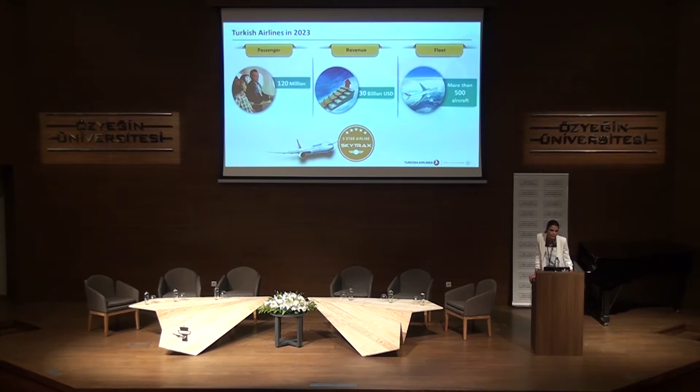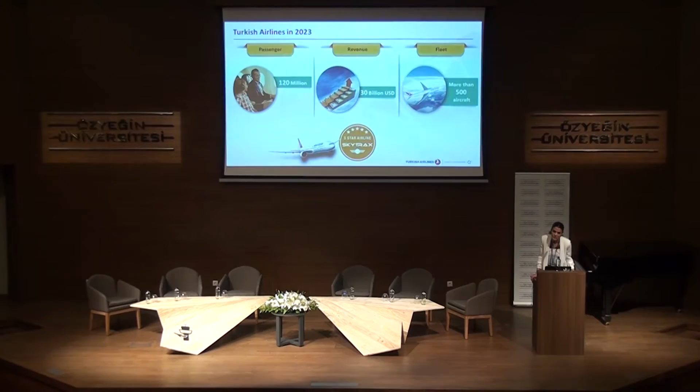We said that today's aim is to discuss how airlines are shaping their strategies with the introduction of Istanbul New Airport. And this discussion wouldn't be possible without a representative from Istanbul Grand Airport. Therefore, we welcome İrfan Gündüz, Senior Advisor to Chief Executive Officer of Istanbul Grand Airport.

Let me introduce myself. I am İrfan Gündüz. I am an aeronautical engineer, graduate from Istanbul Technical University one year after Mr. KOTIL. This is my 30th year in Turkish civil aviation, and I am very happy that I had a chance to work in all subsectors of aviation, including airline, technical organization, finance of aircrafts, ground handling industry, airport construction, and airport operation. Therefore, it is good for me to be here to answer all of our questions.

Let's have some information about our project, and especially we would like to give the final status. As you know, we are targeting to open at the beginning of 2018. In Turkey, nobody believes abroad how we do this construction so fast, because the model of the project we call BOT - Build, Operate, Transfer - which was started in 1997 with the Antalya Airport project.

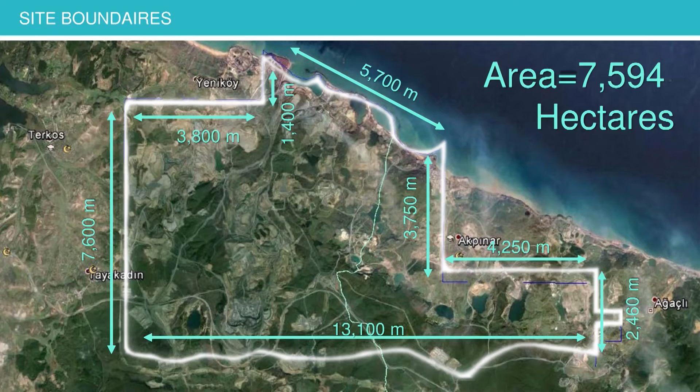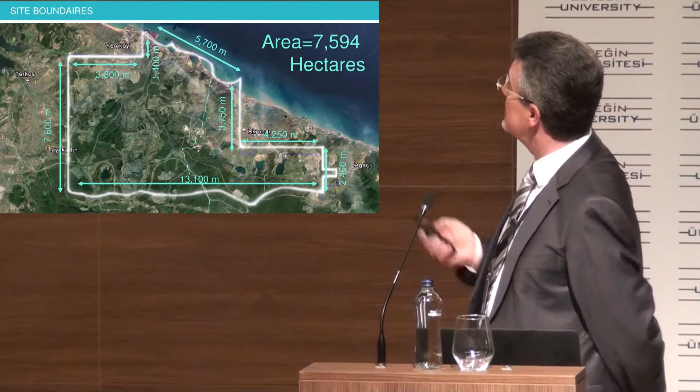Let's look at the master plan. This is north of Istanbul, near the Black Sea. Most of you know the place very well, I think. Before this site was selected, there were huge studies done by the State Airport Authority to find a proper place, but when you look at the Istanbul map, this is the only area where you can have this size of airport. I will explain what this size means - it is about 13 kilometers in length and 7.6 kilometers in depth, 7,600 hectares.

Atlanta, last year in 2015, handled more than 1 million operations - this is the number 1 airport in the world - and their area is 1,900 hectares. If you look at the existing Atatürk airport, it is about 1,200 hectares. London Heathrow does 2 independent parallel runway operations - they handled 75 million passengers last year - and they have only 1,200 hectares, and they have problems.

They are not able to put 5%, 10% more capacity due to their runway shortage. If you follow the news, building new runways costs maybe 3-4 times more than our construction cost because of land problems around airports. Even Beijing, which did 90 million passengers—which is what we target for our first phase—has 2,300 hectares on site. Therefore, the size of the area arranged for airport development is very important. The biggest is Dubai's Dubai World Central Airport, then Malaysia, and our size is the 3rd in the world.

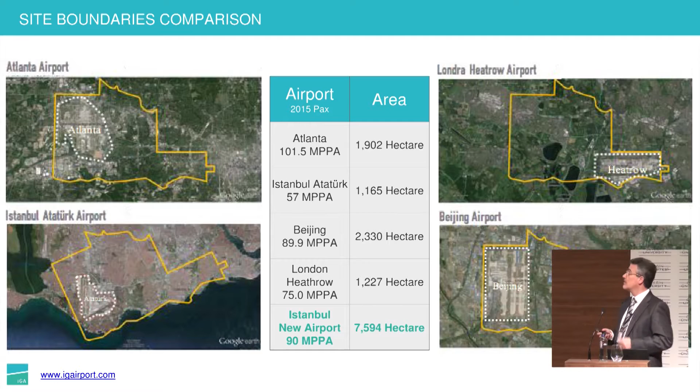Let's look at the phasing plan. There will be 2 parallel independent runways at the opening day of our first phase, with a 90 million passenger capacity terminal. There will be maintenance facilities, cargo facilities, ground handling, catering facilities, and all other supporting facilities when we open the terminal. During this phase we will have 90 million passenger capacity, and we expect 80 million passengers at opening. The 3rd runway will be complete 16 months after the opening of first phase A.

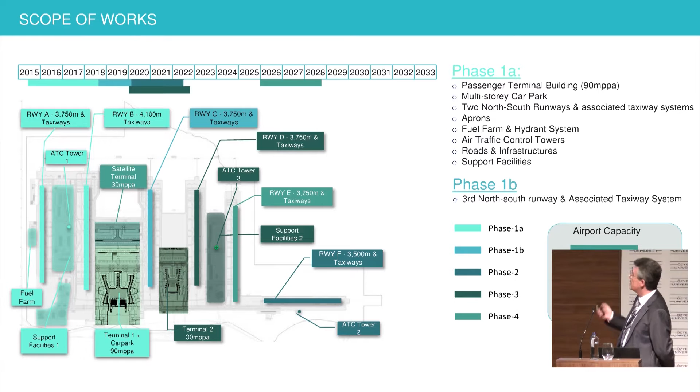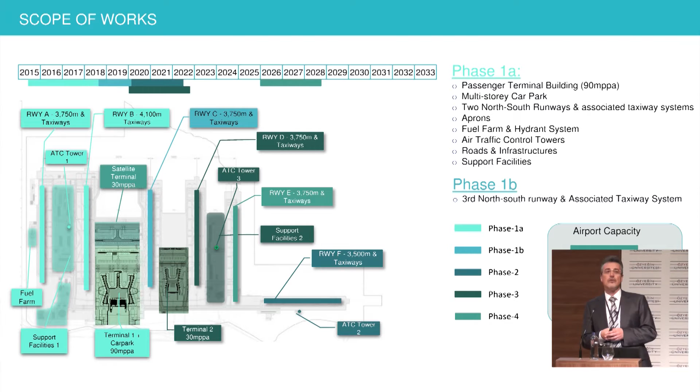The 2nd phase will start in 2020 with an east-west runway. At the same time, the 2nd terminal and 4th runway construction will also start, because there is a target trigger given in the agreements: when we reach 80 million passengers, we have to start 2nd terminal construction. This means construction activities will continue on this site for the coming 7-8 years. In the final phase, with a 6th runway and satellite terminal, airport capacity will be 150 million. But based on our studies, we are sure we will be able to handle more than 150, even 200 million passengers. You can be very flexible.

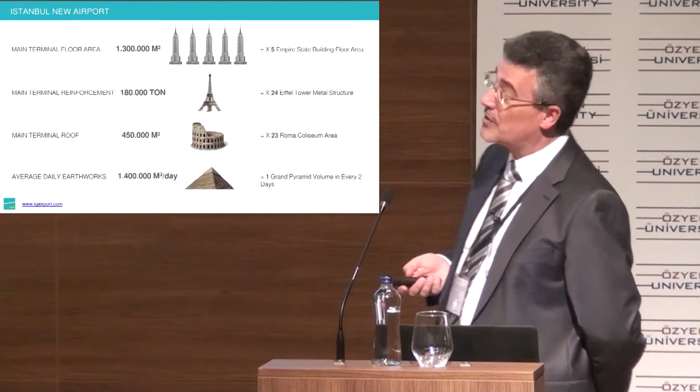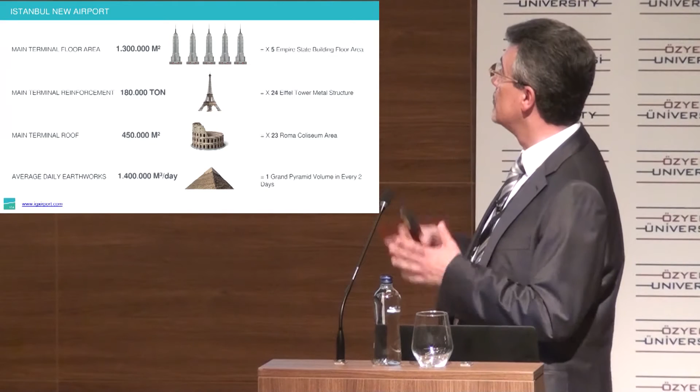Construction period—let's give some brief information and comparison. The main terminal area is 1,300,000 square meters. This is the biggest one-roof building as a terminal. If you look at it compared to 5 Empire State Buildings, in reinforcement, and 24 Eiffel Towers in steel will be used. The roof you can compare with world buildings.

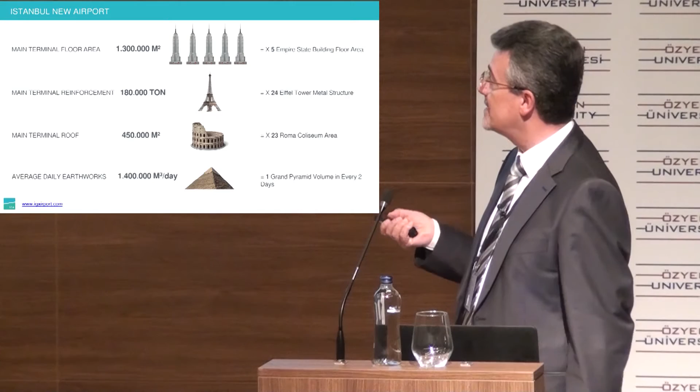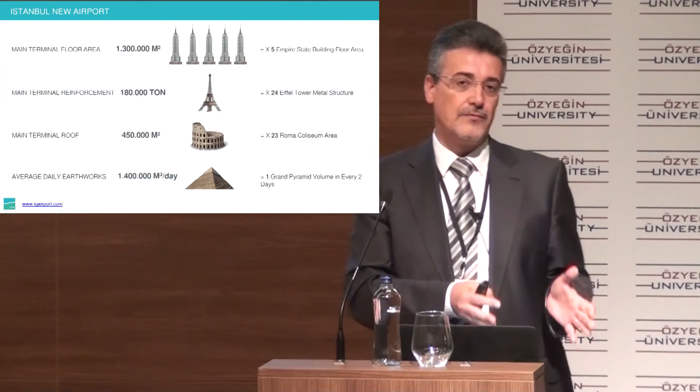This is very important because the main part of the work is related to earthworks. The site is an ex-mining zone, and there is a huge difference in elevations. Therefore, in some parts we are doing cutting, in some parts filling. In a day we do 1.4 million cubic meters of earthworks. The concrete is 1 million cubic meters. Total construction area, including the partner buildings, Turkish Airlines hangars, ground handling facilities, and all other facilities, will be 3.5 million square meters—and this is only the first phase.

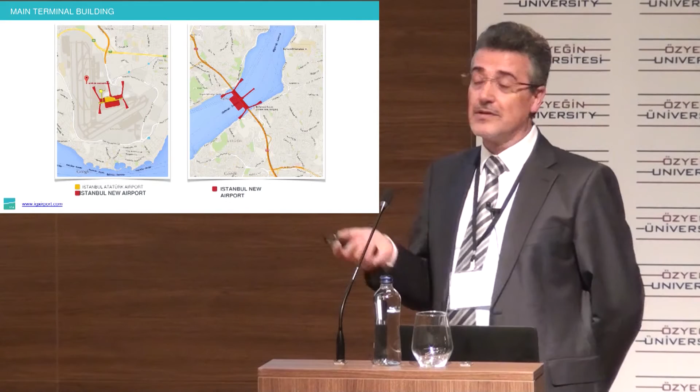If you look at the cabling, it's 6,000 kilometers—between London and Istanbul, 2 times back and forth. The fiber optic we will build is like Istanbul to Berlin, or Copenhagen to Delhi. All the numbers are huge. To have an idea of the size of the terminal, we show here that from one side of the Bosphorus to the other side, we are able to reach. This shows the Atatürk Airport compared to our terminal.

How do we do this? The other important factor to have a fast-track project with these capacities: there are 2,200 trucks, and each day it is increasing. There are 252 excavators, and in total about 3,000 pieces of heavy equipment.

This is a short film showing a lunch break. The trucks make tens of kilometers when put back to back. The logistics of these trucks, the management on site, is very, very important.

There are 60 tower cranes at the terminal and car park construction. Even how we remove them from site has been planned in great detail. This is another film showing the existing construction.

This is one of the piers. We have 5 piers in this terminal—you can consider them 5 different terminals, but under one roof. Therefore, transfer passenger operations will be very easy. There is no satellite terminal. If you look at Atlanta, there are 6 satellites separated from each other. In our case, all of them will be under one roof.

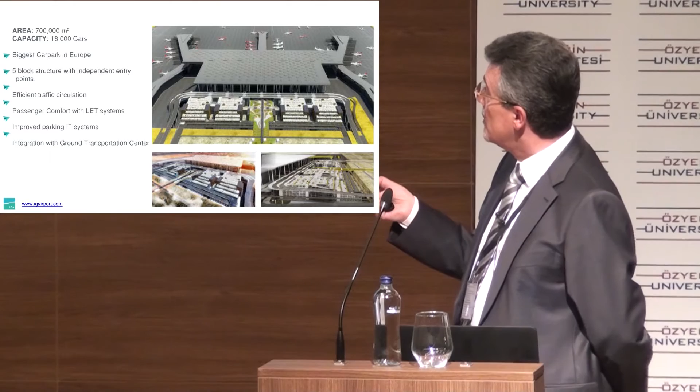This is the car park, designed by one of our Turkish designers. The terminal design belongs to a British company, GMW, now renamed Scott Brownrigg. The company that did the Atatürk Airport and Antalya Airport design is the same for our terminal building. There are 5 different blocks. The capacity is 18,000, but by arranging the parking place, we are able to reach 25,000 capacity.

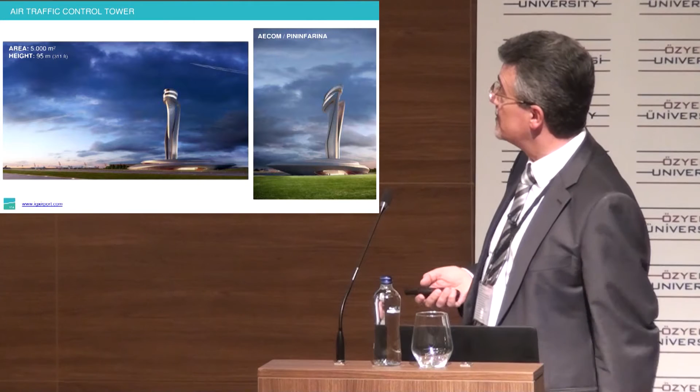This is the air traffic control tower, which is a very special design. We had a competition, and we selected the AECOM Pininfarina design. It is in the form of a tulip.

During the design phase, we worked with our partners. We contacted airlines, Turkish Airlines, and started from day one to work together. We got their fleet plan, their operation plan, and established the design day flight schedule. Based on this, we looked at peak hour figures, because all airports are designed based on peak hour figures. Peaks can be different - Antalya is different, Istanbul is different. Therefore, peak hour estimation is very important.

With this estimation, we use spatial programs and CAST modeling, which is a very useful tool for design, maybe you have similar models at your university. When you give the parameters and assumptions, it directly gives the number of processors needed - check-in desks, passport desks, security lines, all kinds of processors defined by these simulation models. This is the first time in Turkey that airport design was completed with full simulation.

This is airside simulation, involving a huge number of equipment. Our friends from ground handling companies are here, they know better than us. There are about 4,000 to 5,000 pieces of equipment turning in a small area. From day one, we had to plan the logistics of the airport, and also airside operations - after landing, there will be 90 landings and takeoffs during peak hours. You have to build your simulation so there are no bottlenecks at the airport.

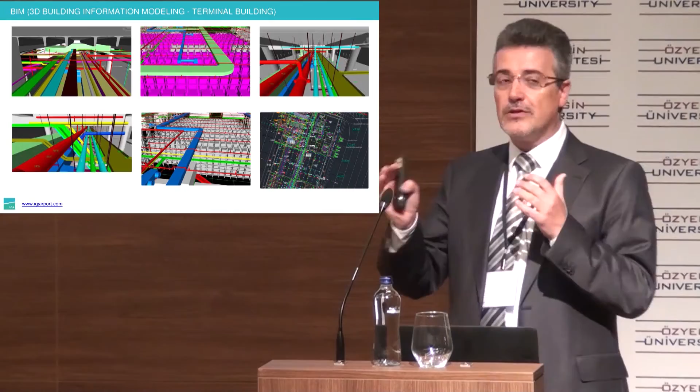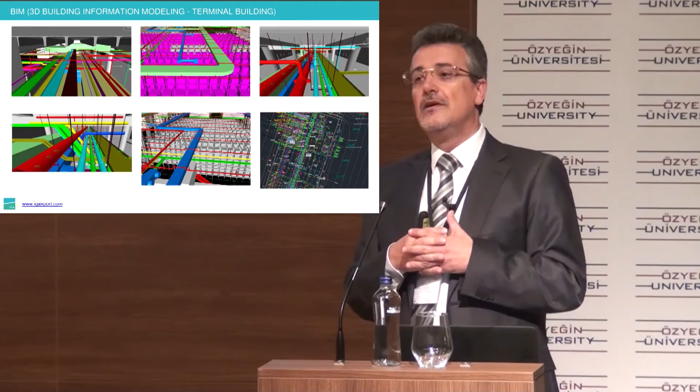Another important model is building information modeling. This is the biggest project we've used with this model - we believe in it, we know it works. What you do is put all disciplines' drawings into this model, including architectural, mechanical, electrical, IT, and then check if there is any clash or problem. Before going to the construction site, you solve the problems with this computer model. Every week we have coordination meetings where each discipline comes together to solve issues, and then construction starts. This is another great tool for fast-track projects.

Government announced a new project, which is very huge and important for our airports. There will be a tunnel from Hasdal to Ümraniye, a 3-level tunnel with metro and 4 car lanes. From Ümraniye to Hasdal, this main connection will take 12 minutes, which currently takes more than 1.5 hours.

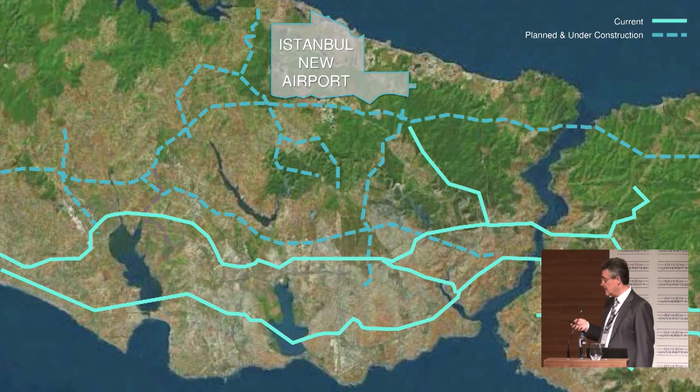This is a metro and railway system connection. There is also a possibility for a high-speed rail on the Third Bridge, which will connect to our airport. From Gayrettepe to our airport, there will be a metro station with a metro line of 4 stations, allowing passengers to reach the airport in 25 minutes. This is under tender and will be ready by our opening.

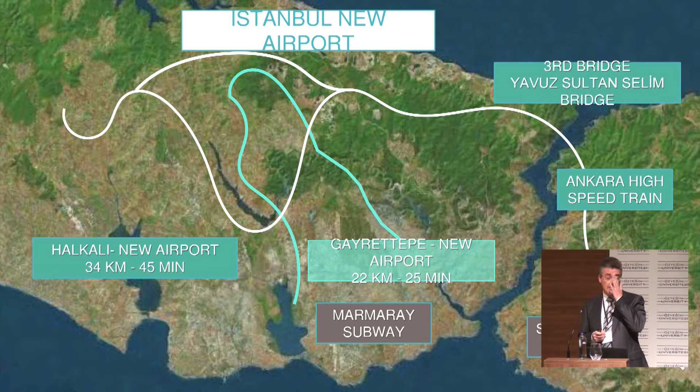We have a short film about the passenger terminal.

There are 7 entrances to the terminal, which we will arrange by airline. 75% of traffic is expected from Turkish Airlines, so we will arrange the entrances accordingly. Check-in islands will also be arranged according to airline needs. There will be 13 check-in islands, each with 40 check-in desks.

But as you know, check-in systems are changing all around the world. Everybody is trying to use the internet or mobiles for check-in.

This is the departure hall, and these are the check-in islands.

There will be green light and water inside the terminal. This is an opening at the roof, so we will have daylight into the terminal building. This hall leads to the baggage arrival hall.

This may be the first time in Turkey, though I'm not sure about the world. At the baggage hall, which is normally the darkest point of terminal buildings, there will be daylight.